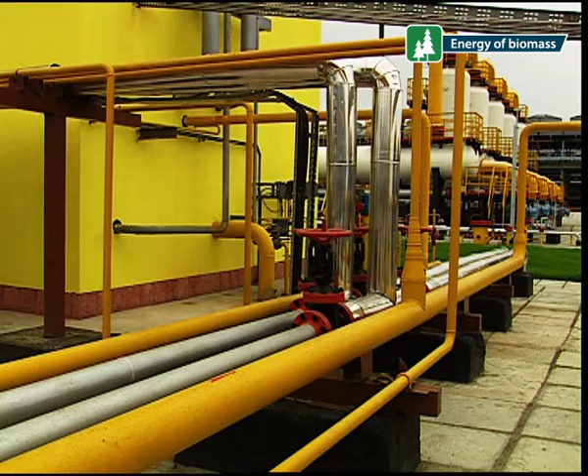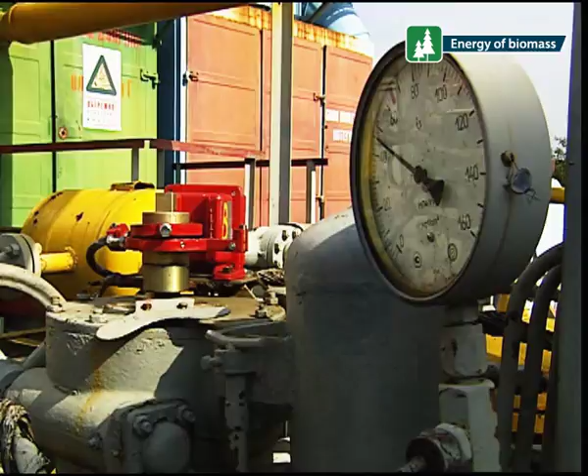Today, Ukraine depends on the import of natural gas, the biggest part of which is used for heat production. This dependency can be reduced by diversification of the supply chain and by increase of renewable energy sources usage.

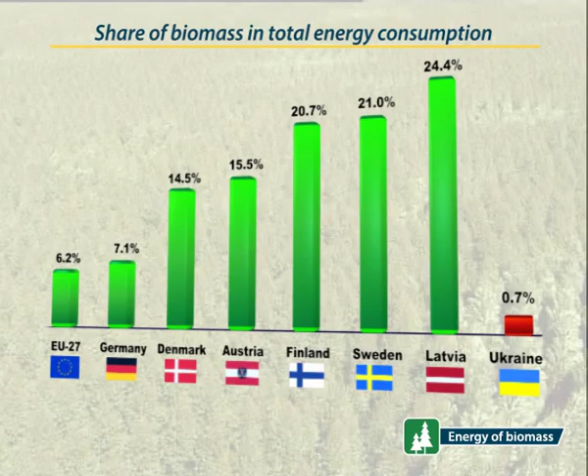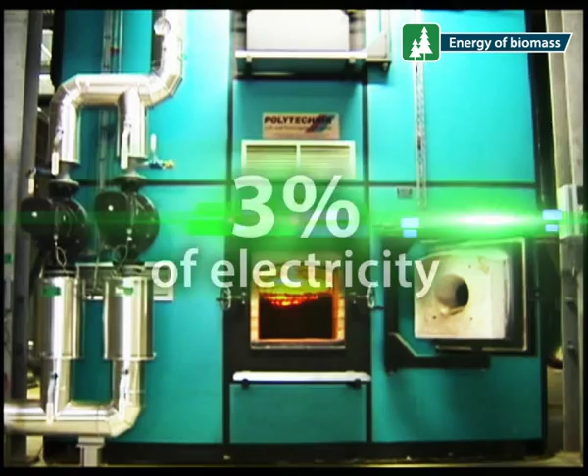Heat supply based on biomass is widely used in European countries. This renewable energy source is used as fuel at more than 800 combined heat and power plants and in tens of thousands of boilers. Today, 13% of heat and more than 3% of electricity is produced from biomass in Europe. It is planned to double these figures by 2020.

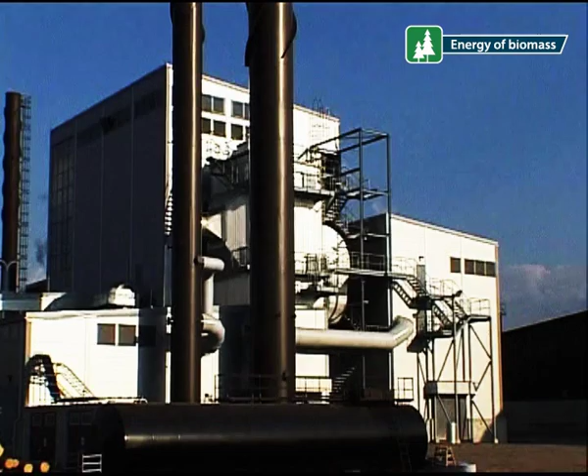Biomass Energy is a portfolio of projects aimed at the production and sale of green heat and electricity in Ukraine. It is realized by the implementation of biomass boilers and CHP plants in the municipal sector and industry.

The project, as a part of National Project Energy of Nature, is strategic for Ukraine, is aimed at sustainable development and is secure for investments. The purchase price of imported natural gas is growing annually. That creates stimuli for gas replacement by renewable energy sources, including biomass.

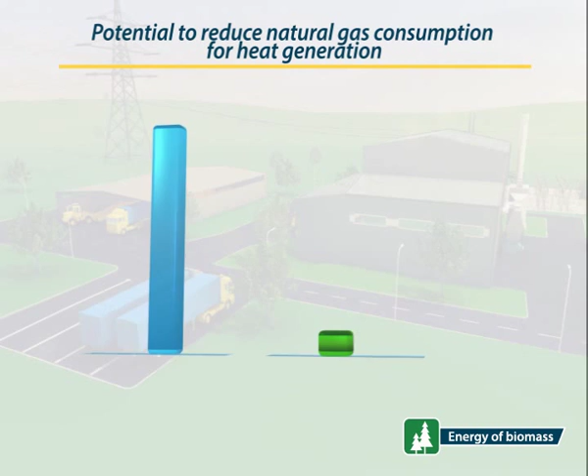Implementation of the project will result in reduction of natural gas consumption by over 5 billion cubic meters per year. The investments in the sector can exceed 2 billion euros.

The first step of the implementation of the project Biomass Energy is construction of a biomass CHP plant of a typical capacity of 2 megawatts electrical and 10 megawatts thermal. The plant will annually consume up to 40,000 tons of wood biomass, which allows supplying thermal energy to more than 100,000 square meters of heating area.

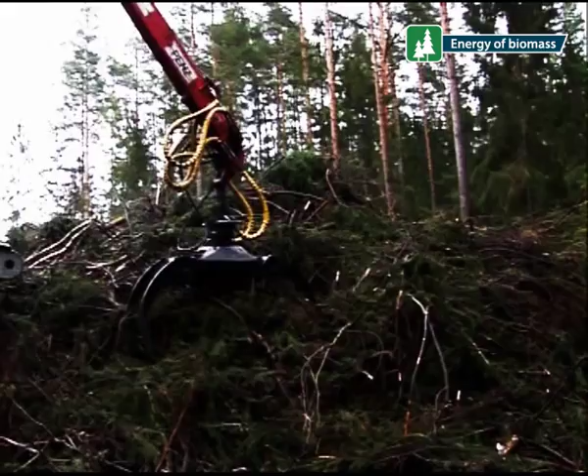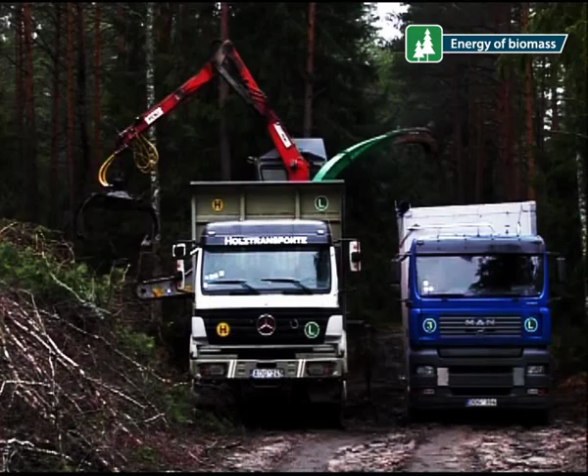The process of electricity and heat production at the plant begins with collection of the feedstock in the place of its origin. Wood residues are collected and shredded into wood chips in a mobile chipper. Then the obtained fuel is transported by a special vehicle directly to the CHP plant.

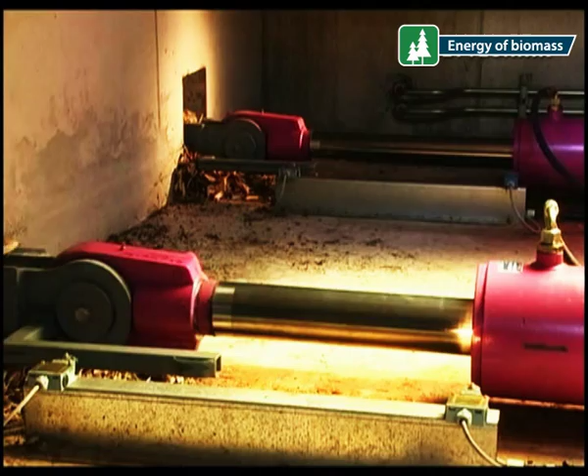It consists of 3 main buildings in which the fuel storage, the boiler house, the turbine house, and the offices are located. From the main storage, the fuel is transferred to the walking floor bunker, from which it is automatically supplied into the boiler for combustion.

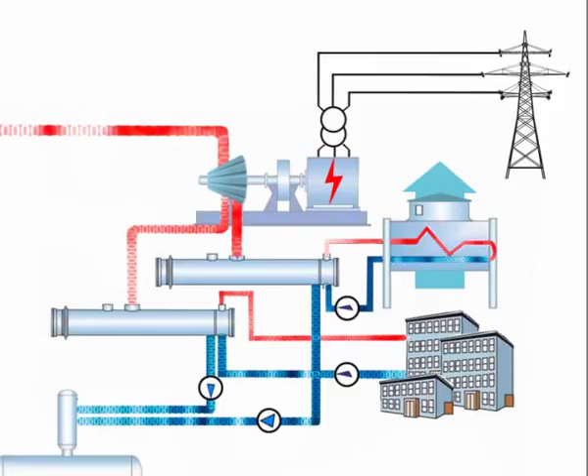The boilers, which produce steam for the turbine, are the core of the station. Steam turbine drives the electric generator. Flue gases are cleaned by the modern precipitator. Therefore, the station meets all current environmental requirements.

Electricity generated at the plant is transmitted to the existing electrical grid and is purchased by the state enterprise energy market. The state guarantees the purchase of 100% of the generated electricity at a specially established feed-in tariff until 2030. Heat energy is sold to the local district heating company, which then transports it to the end users.

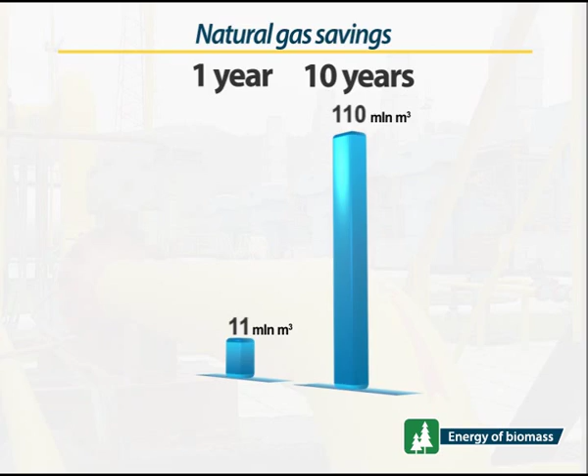Operation of such a CHP plant leads to annual saving of natural gas by over 11 million cubic meters. It corresponds to a monthly consumption of a city with a population of about 70,000 residents, and reduction of greenhouse gases emissions is more than 20 thousand tons of CO2 equivalent per year.

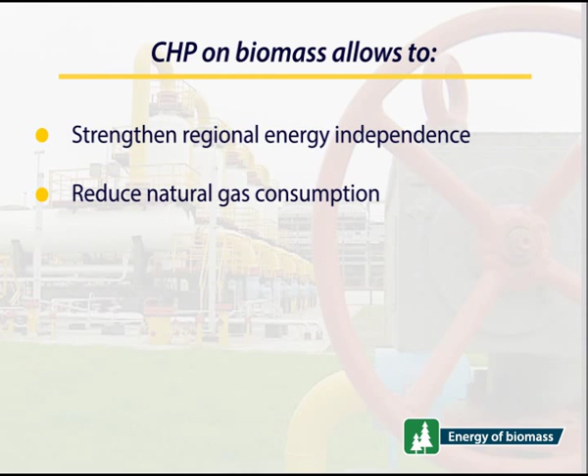Implementation of the CHP plant gives an opportunity to strengthen regional energy independence, to reduce natural gas consumption, to replace outdated equipment with modern and energy efficient equipment, to reduce greenhouse gases emissions, and to create new jobs.

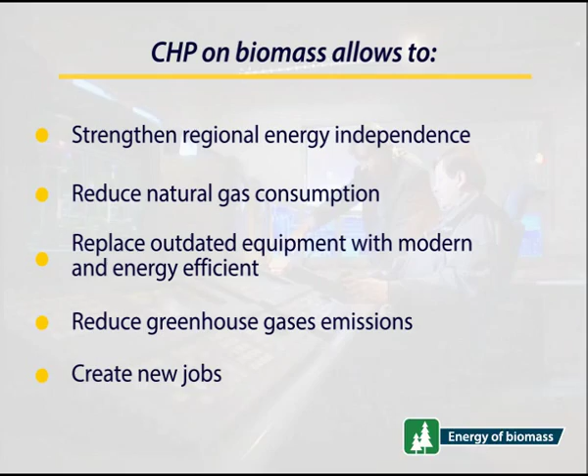The project Energy of Biomass creates favorable conditions for investors of bioenergy projects. Green energy is our goal.